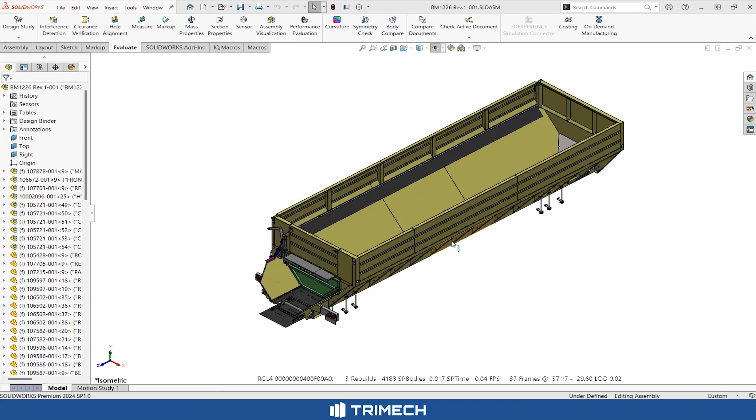So let's take a look at this assembly. It's a medium-sized assembly of about 4,365 components, and it takes quite a bit of time to load. Let's imagine you want to open it instantaneously, quickly. We're going to open it in large design review mode.

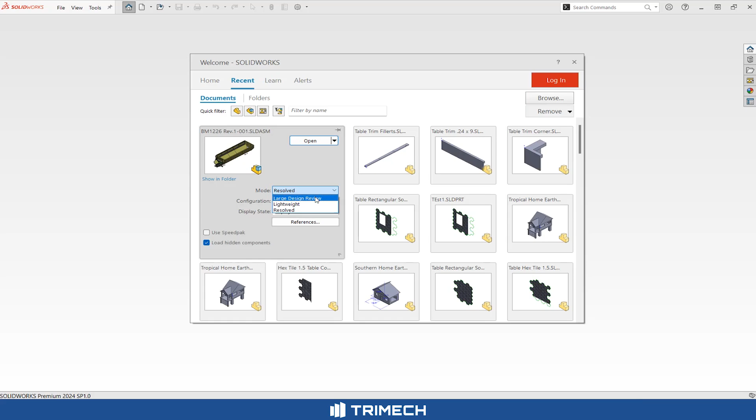This is not new functionality for SOLIDWORKS, we have done it before. But what is new now is that it's so much easier to navigate to the assembly, because breadcrumbs become available in large design review mode. Now let's try one thing. One reason we prefer breadcrumbs to using the feature manager tree is that every time you select something in the feature manager, SOLIDWORKS has to go find that component and try to scroll up and down the feature manager. It does more than that - it needs to expand sub-assemblies or folders, and for really large assemblies this can be very, very time consuming.

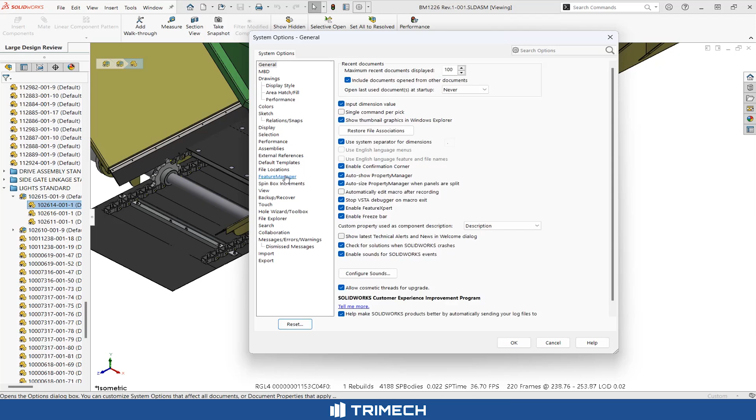So you can actually turn off, when you are in a meeting, the option to scroll selected item into view, and that kind of frees you from the tyranny of the feature manager tree. I don't really need the feature manager anymore in order to find the sub-assembly.

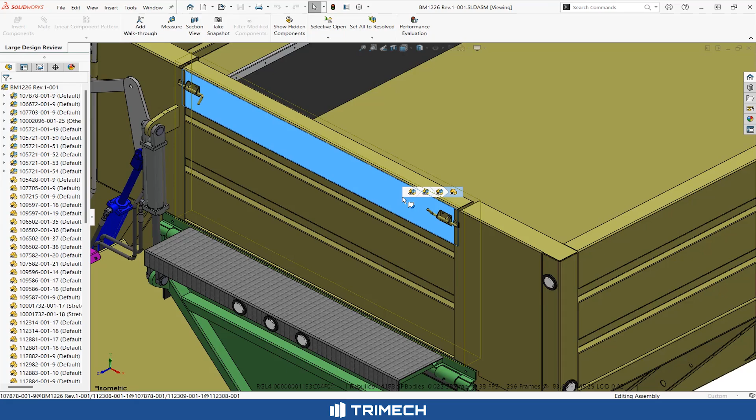For example, let's say I want to open the sub-assembly that contains this part. I can simply click on the part, then just to save even more time, I'm going to press the D button, D from Delta, and you can see this is the part I selected. It belongs to this sub-assembly. So let's say I want to open this sub-assembly, and the way I want to open it is in position, the same way it's currently displayed on the main assembly.

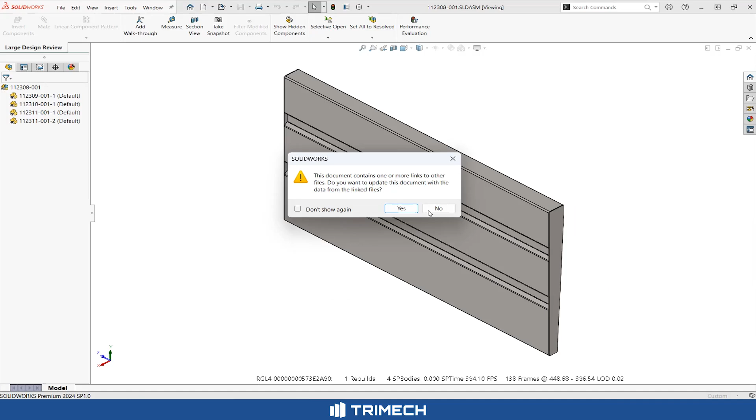Let's take a look at the result. Look at that, it got opened. And more importantly, it was opened in large design review mode. This is very important. Let's try one more thing.

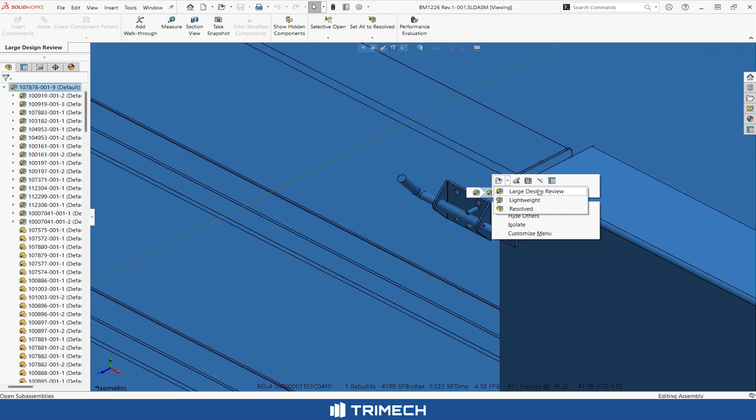Let's open the sub-assembly containing this. I'm going to press the D button, and go directly to the top level sub-assembly containing this. Notice also I have the option to open it in lightweight or resolve, but let's stay with large design review mode. Alright, so you can see it got opened. From here...

I might want to go back to a lower level sub-assembly and open this one too. You can see everything can happen really, really fast.

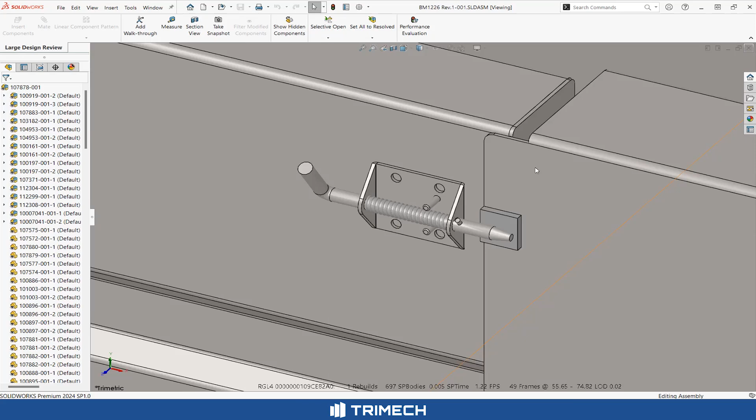What else can we do in this mode? Let's go back to the main assembly, and this time let's select again this sub-assembly, and from here let's open its drawing, and you can see how instantaneous I have access to a 13 sheet drawing directly from the graphic area.

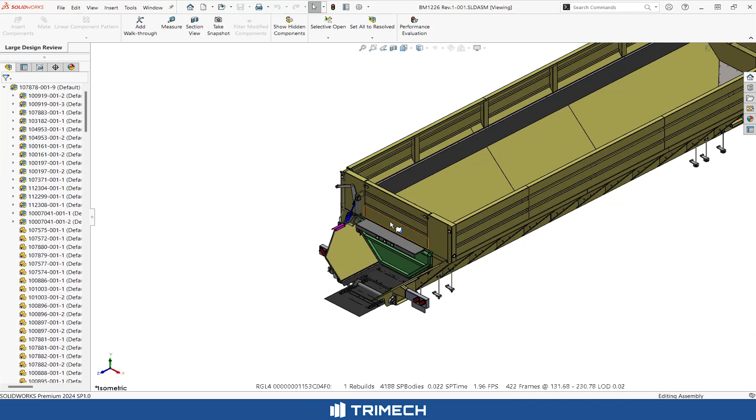This is a tremendous improvement in performance, and more were reported to come at 3DEXPERIENCE World 2024. Apparently in Service Pack 2, we'll also get the component preview window formats and more stuff like that. This is a great time to be a SOLIDWORKS user. You no longer have to wait a whole year to get new enhancements - we are getting some of them with every service pack.